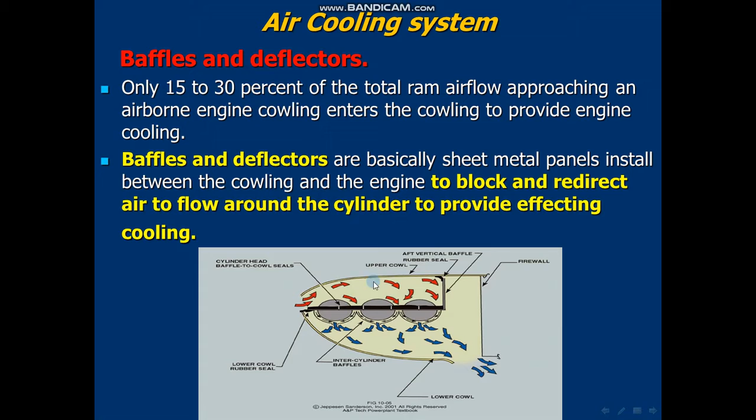Here we have the aft vertical baffle. After that we have the rubber seal to prevent air from going outside. And here we have the deflector that redirects the air inside the upper cowl.

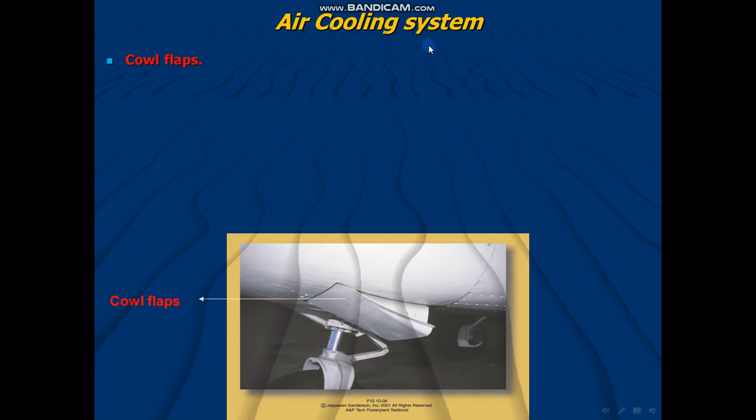After the deflector and baffles, we have the cowl flaps. On some aircraft engines, the amount of cooling air that flows through the cowling is controlled through the use of cowl flaps. These are the cowl flaps, and they're located behind the engine.

The cowl flaps are hinged doors that are installed in the bottom rear of the cowling where the cooling air exits, and they're controlled from the cockpit manually, electrically or hydraulically.

Note, they should be in the full open position during all ground operation because the airflow is greatly reduced. While in flight, more air is forced into the cowling. This allows them to be closed to eliminate drag.

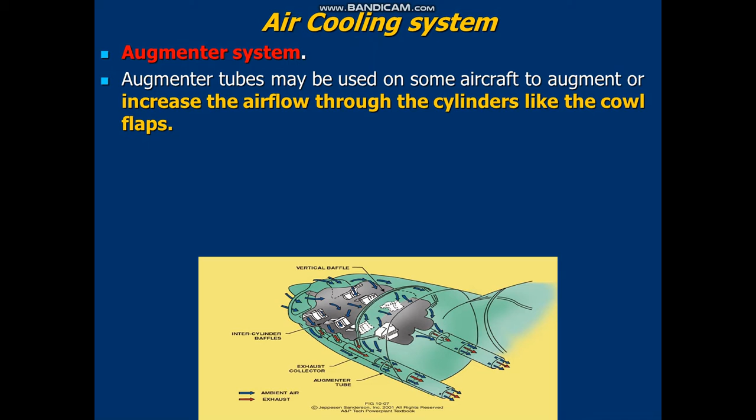After we talked about the cowl flaps, now we will talk about the augmenter system. Augmenter tubes may be used in some aircraft to augment or increase the airflow through the cylinders, like the cowl flaps. Augmenter tubes create a low pressure area by high velocity of the exhaust gases routed into a collector and

discharged into the inlet of the stainless steel augmenter tube at the lower rear of the cowling in order to increase the airflow through the cylinder cooling vents. As we see in this figure, here we have the exhaust collector and this is the augmenter tube.

The last thing we will talk about is the blast tubes. Many engine installations use blast tubes to direct cooling air into inaccessible areas of an engine compartment.

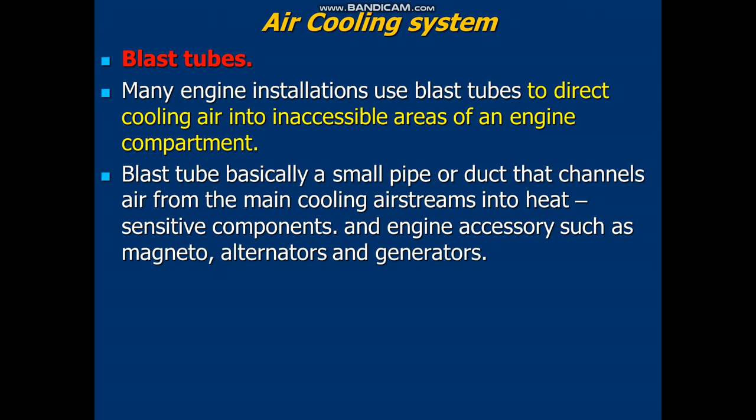A blast tube is basically a small pipe or duct that channels air from the main cooling air streams to heat sensitive components and engine accessories such as magnetos or alternators and generators.